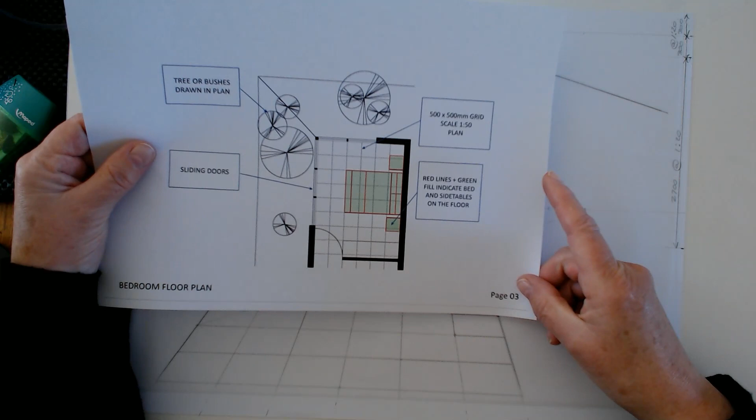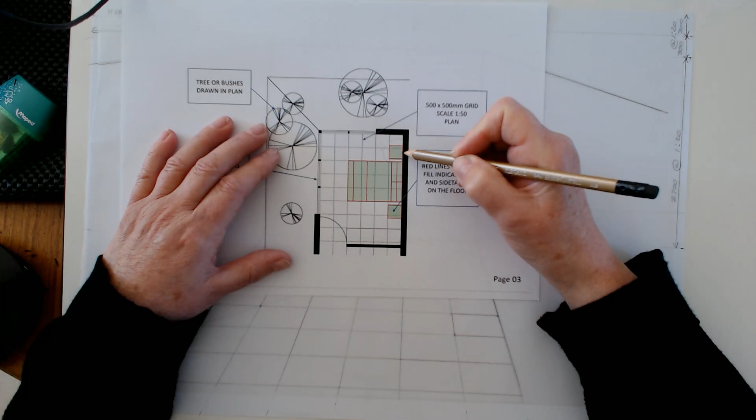Yeah. Okay, so I could just use this piece of paper now so that you guys can see what I'm talking about rather than having to go off screen all the time. Okay, and then I can draw all over the top of it, which is always good. Okay, so we're going to draw this one first. Yeah. Okay, so as you can see, it starts just before this first grid here. All right. So if I look at that, I also can see that it's only 500 wide as well. So let's draw this one first and see how we go.

So I'll put that up there so I can see it. And so this is my first grid on the floor. And as it was saying, it's going to start a little bit before. So I draw a line a little bit before the end of this first one. I'll draw it so it comes out and it hits the 500 mark there. That's a 500, that line there. And then it stops again a little bit before the second one. So I'll draw that. And so then I will have something that looks like those two lines. And then I'll go from the front line here, follow it back to the vanishing point. And then I should have, sorry, Pussycat's coming over to help again.

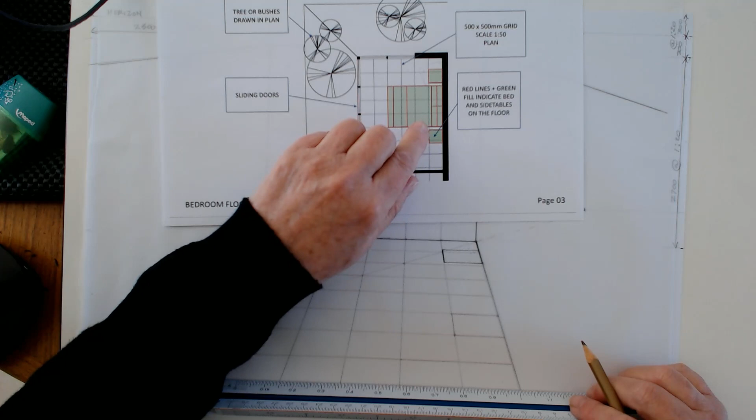I should have something that's like that. So it starts just before the first grid and then it finishes just before the second grid. So if you look at this one here again, just before the first grid and just before the second one, because the bed actually starts 2 boxes from the wall, and it comes out 4 boxes or 4 grid lines.

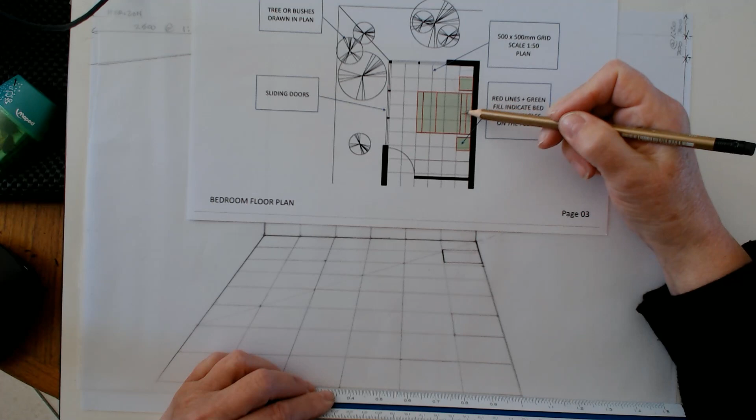So I can count that. I can go 1, 2, and it starts here, right on that line, and it comes out 1, 2, 3, 4. So it finishes out here. And then it's 3 of these grids wide. So I go 1, 2, 3. So that's where the bed finishes on the ground. And then it comes out 1, 2, 3, 4 to here.

What are you doing? Stop doing that.

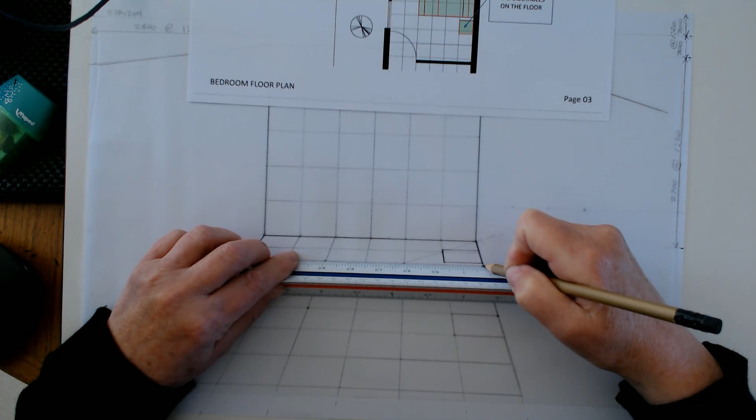And then I'll end up. So the grid on the actual plan will help you place the grid in perspective. And again, I can go from here, from the front part. It'll follow the grid anyway. Draw a line so it does that. I'm just going to get rid of that thing underneath here, so it's not as dark, so you don't get confused by that. That's just me bringing that back a bit so it's not as dark as it was.

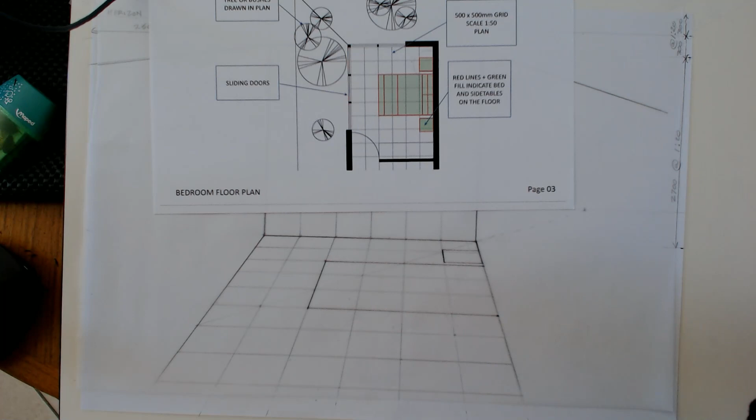There we go. Okay, so far we've drawn the first side table here, and then the bed, and then you guys work out where the second side table is, and I'll draw it. So the second side table starts a little bit away from the bed. So if I go, okay, a little bit away from the bed, so I'm looking at about this much, and then it finishes 500 again, so I go to the next square and do that.

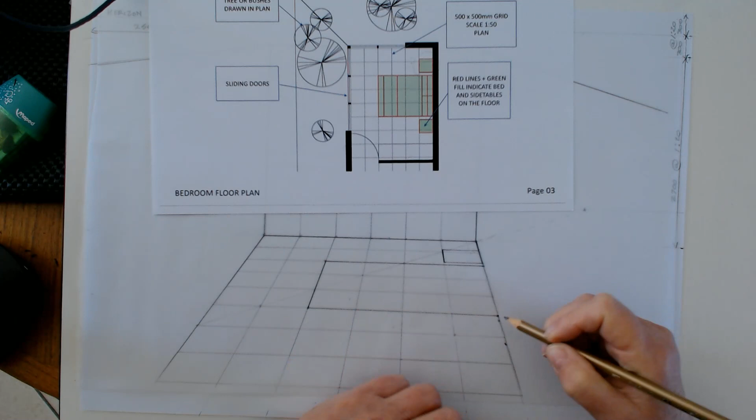Now here you can see that the space between here and here is different from the space here and here, and that's because it's getting bigger as it comes towards you. So I'm sort of navigating and just making it start where I need it and finish where I need it to finish. And again, then you can draw the lines going across out to the 500, because that's how deep this is. And we follow that one out. Use your T-square, or make sure your ruler is parallel with the grid.

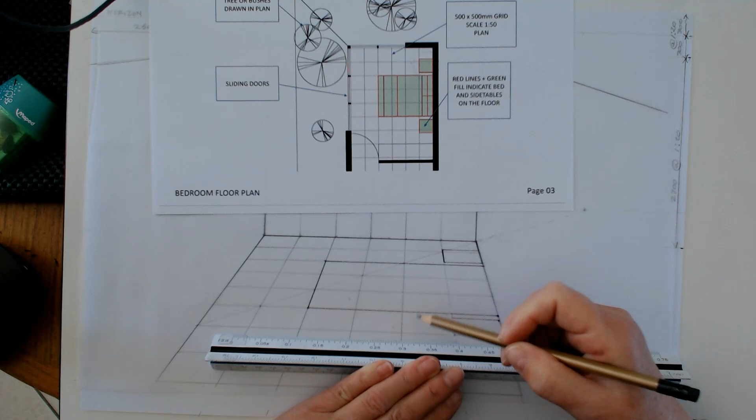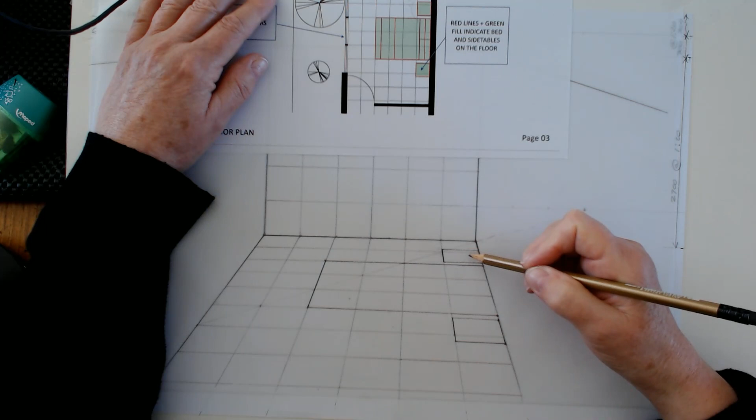And then if I follow this front part back to my vanishing point, it should intersect those lines. So there is the plan drawn on the grid. So this plan now has been drawn on the grid in here, as you can see. And if I put a piece of paper underneath it, probably better for you guys to see. You should have something that looks like that. Yeah? Okay, good. Let's draw the windows in, which are here.

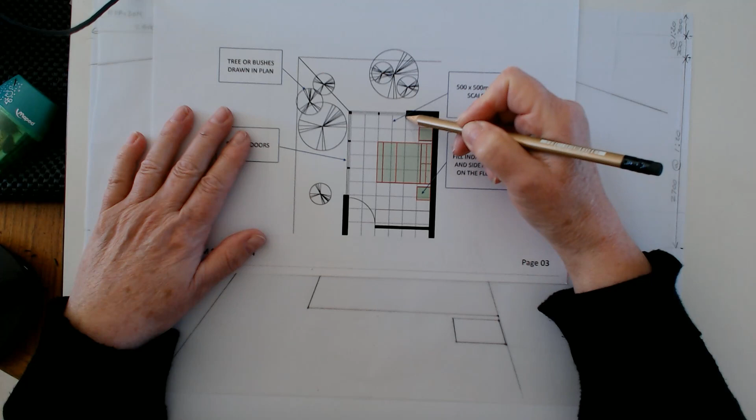So the wall stops a meter from this wall here, and then each one of these is a meter away, because each one of those squares is 500 by 500. So if I go back to my grid and mark on, it starts 1 meter in. And that's where the first door is going to be. The corner of the room is going to have a door, and then I'm going to count 1, 2 boxes in perspective on the ground, and that's 1 door, another 2 after that. That's my second door, and that's my third door. So I've just marked those using the grid.

The height of the doors I changed from what he's done. He made his 2100. For the purpose of what we're doing, make the doors go up to 25. So if we count up, 1, 2, 3, 4, 5, it just means that you don't have to measure something again. So you can either have them at 2000, which will be roughly 2100, or you can have them at 25.

All right. So if I follow that up to the 25, I can draw a line going up like this. I can draw a line going across until it hits the corner of the room. And then I can draw this one going up because this is the second one. I'll draw that one in. So that's my 2 sliding doors there.

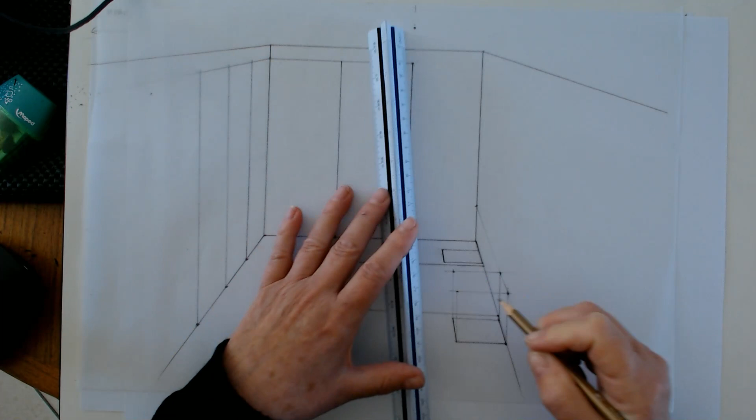So this one will come up until it intersects with that line that came out, and this one will do the same. Make sure it's as straight as possible, and then I need to draw a line going from here to here, and I can do that by putting my pencil on that point and going back to my vanishing point. And if I'm good, then that line will go through that dot that I just had here. So that's how you get the height on any of your objects.

Okay. Yeah, but I think I have to. No, I think I'll do it now. Because my stuff. No, all good. Yeah, I've done it. Okay. So there's the first one. You all right, kitten?

Oh. Sorry, that's exactly where I have issues. So mine, this side, I don't know if I can show you this. How can I show you? Can you see that? Yes, I can. It looks big, like bigger than yours, and it passes the line of the bed. Yeah, no, it looks fine to me. Looks fine? Yeah, I think it's going. So the top, okay, I should do this, so it looks, maybe it's correct. It's probably correct, it's just that mine looks smaller on screen maybe. But as long as you've done... This is the bed, like one side.

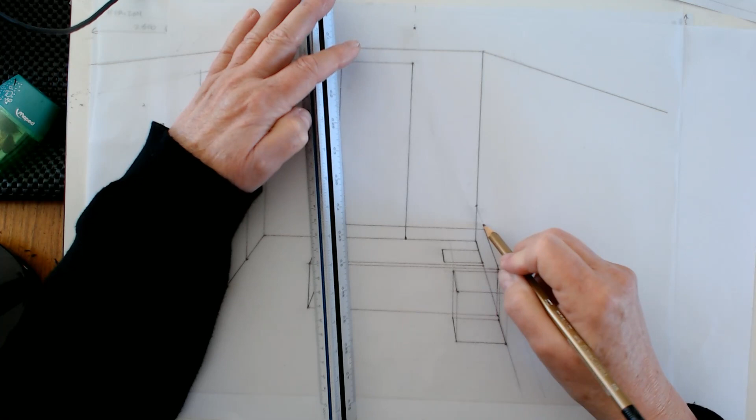I've used my ruler to find the point and then I've marked it. But don't draw the line because then you end up with too many lines. All right? And you can do the same with this one as well. You can put your ruler at the bottom of that one and then again, if I could get this straight, I'll come up and mark it on that 500.

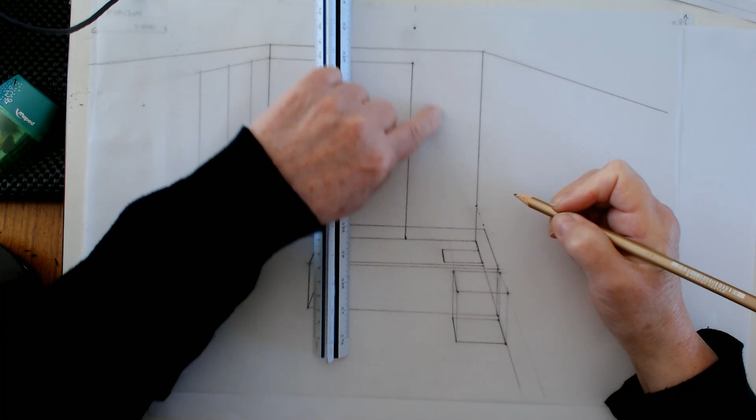Right? And then again, I will draw from there straight out into the perspective, keeping my lines straight. On this side, I don't know if you can see that, I'm using these lines here to keep my ruler parallel. And I'll draw that coming out. Not very far because it's only the table.

And once I've done that, and once I do the other one on the other side, drawing a small line out, I can actually come back to this one at the front here, put my ruler between that point and the vanishing point, and draw a line going between these two lines I just drew out that way. So we've just drawn the top of the other side table.

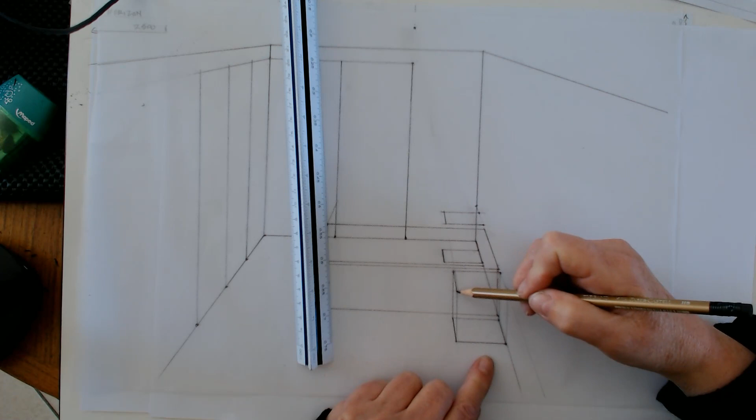All right. Okay, sorry. Why do you use the other table? Because it's still the corner, and it makes it easier for me. Rather than bringing it up this way, I'm actually using this so they both look like they sit properly together. All right, so the same line. Yeah, and they will be the same line. That means I don't have to draw another line going up here and another line going up there. Again, it's cutting down on the amount of line work. So I can use another object of exactly the same shape and size to help me draw this one.

And then all I have to do is some very, very simple lines that go straight down. So they will be vertical at 90 degrees, and then I can see the top of my table. Can you see that? Yeah. Okay. Then get rid of all the stuff that you don't want to see. So I'm going to get rid of that on the bottom. I'm going to get rid of the line inside the bed there as well, because that's annoying that I drew on the ground. So I get rid of it. And I'm going to get rid of that line too because I won't really see it.

And I'll just clean up these lines as well. I won't see the bed inside there, and I won't see that line or that line, and then I won't see that or any of that because the bed's there. So I'll get rid of that. And I end up with that. And then I'm going to, this is really weird, use that, and that one. So I end up with something that looks like that.

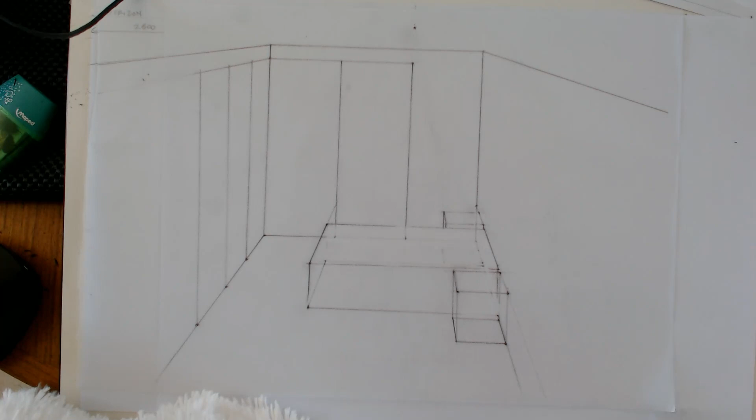All right, so put another piece of trace paper on the top like this, and then I'm going to stick it down. Sticking down is always a good one.

Yeah, I don't think this is the right black rubber. You know how I've been going on about black erasers and how wonderful they are? Well, I don't think this is the right brand. It's awful. I thought it was better than that. I was really excited for a minute there.

I'm not excited anymore. All right, so this is making it look a little bit better, and we can see it. Now we can start to get a little bit creative. So what you can do is very lightly go over what you've already done, but leave out any lines that you don't want. So I'm going to leave that line out and that line out so I don't see it all the way through. So I'll just very lightly go over it.

So the final version is very neat? Absolutely. On another trace paper? Yeah, where we don't need all of these dots. No. The dots and things will disappear. It's just so that you can see. But you redo it on the second trace paper? Yeah. It's just so that you can end up with something neat. But you do the dots for us? Yeah, so that you can see where things are intersecting.

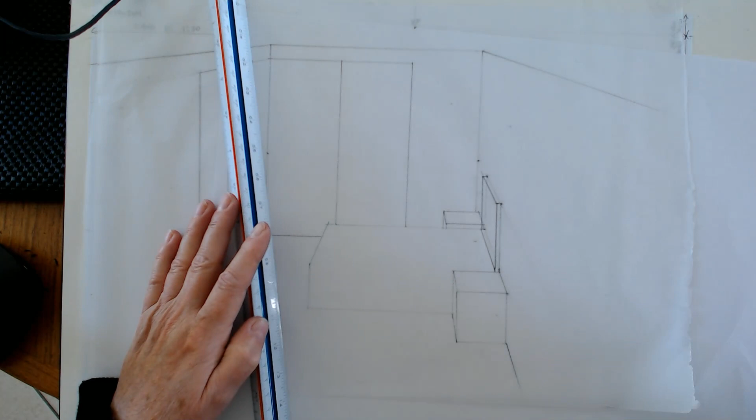So anything that remains vertical and horizontal will remain vertical, and lines that go that way will be horizontal. But the sides of the objects, see how the side of that object and the side of this object have angles on them? All have angles. Okay. Yeah, that's right. And then I'm just going to follow that line down so it looks like the bed head goes behind the bed. And then I'm just going to draw a line from there to there, and then get rid of that. So I'll miss part of my other side, and then that's my bed head. Just very simple. Just make it square.

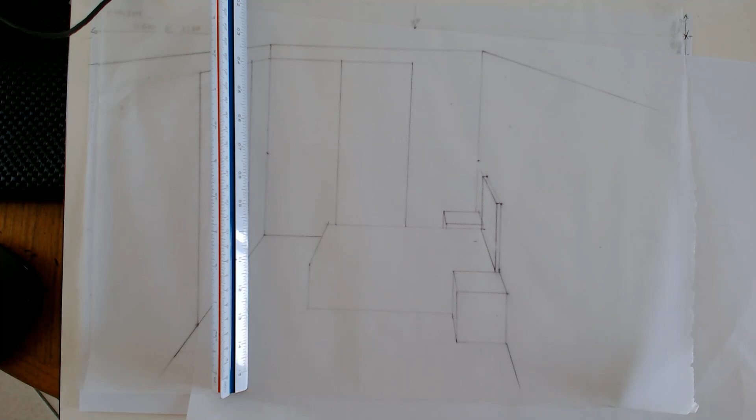So all of these, when you look at them, they've got a face and two sides, and they've got a top. Now the face of everything will remain vertical and horizontal. Okay? See how that's vertical and that's horizontal? But the sides of everything are at an angle that goes back to the vanishing point. Okay, correct. Now let's put a picture above that.

And I'm just going to draw my picture so it ends up being the same width as my bed head. So I'm just going to draw a couple of light lines from the back of my bed head all the way up. I don't know if you can see those. You can't see them, can you? Let me do that again with a little bit more oomph. That one. And then there. I'm just going to make it sit exactly in line. It's going to be a long picture.

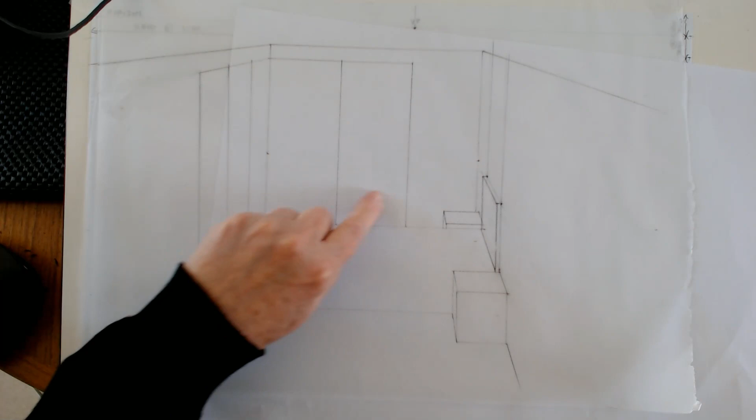Like that. And then I can work out, if I want to have the picture start 300 above my bed head, then I've still got this mark on the back wall. I can measure up on this line because this is the only thing that's in scale. I'll do it this way because otherwise I'll confuse you. Can you see that 300 on that side? I'm going to measure up from that point 300, and then from the top here I'm going to measure 300 as well.

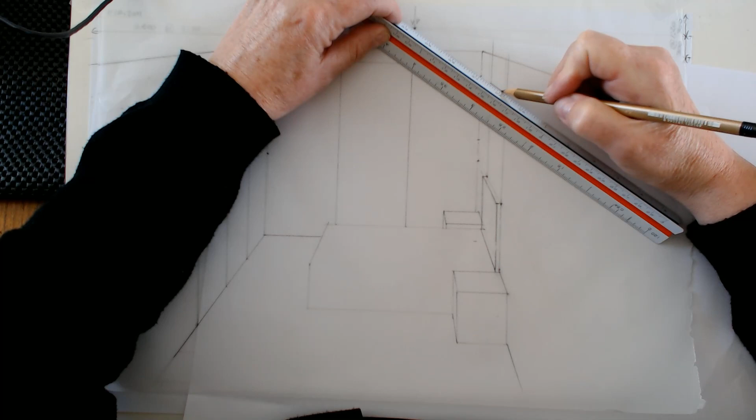So from the top of the room and from where we had the height line point on this wall. Mm-hmm. So up 300 and then down 300, and whatever is left in between. Once I've done that, I can then bring those two heights out along this wall so it forms my picture. So from my vanishing point, between those two vertical lines there, I can just darken in where my picture is going to be, and you can put any sort of design or picture in there like that. So there's my picture. Can you see it? Yeah. Okay, above there.

Okay. Now we're just going to draw the outside where the veranda or whatever it is going to be, and all I'm going to do is go back and use my grid to help me draw it, but I'm not going to use the lines on the grid. So I'm going to pretend somewhere about here that I'm going to draw a line going horizontal all the way across until it gets almost halfway through

that second door. And then from that point, I will draw a line coming down from the vanishing point, and I'll make it stop where the door is. Because I'm actually drawing backwards into the vanishing point, what that's going to do... Sorry, the height of this line doesn't matter? It doesn't matter. Okay? You could make it start from there. You don't have to measure it, just sort of guess it.

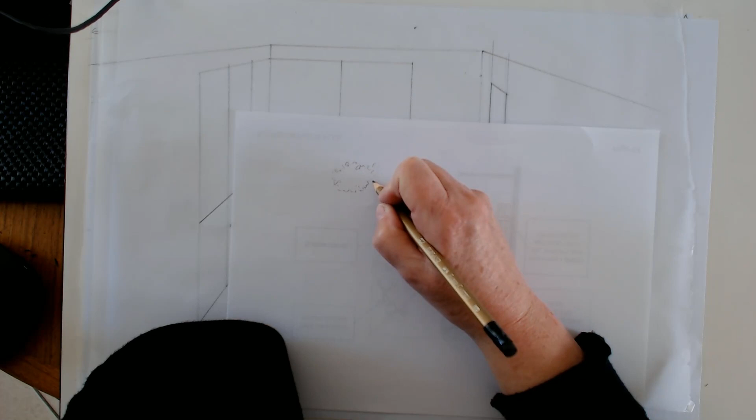So to draw bushes, which sounds really weird to say, it's just a squiggly line. And you don't do all of it. You just do some of it, like this. Can you see what I did there? Yeah. And then occasionally you can put a leaf here and there, like that. And that makes it look like a lovely thing. See it? I think so. My daughter draws pretty much the same. Yeah. Okay, so that's just a bush, all right?

So that's what I'm going to do at the bottom here. I'm just going to very lightly do this, so I know where I'm going to put everything. And I'll do it over here so it sits over the bottom of the tree. Nice little bushy type of thing. Like that. And then these two things on the ground, I'm just going to bring them up and draw.

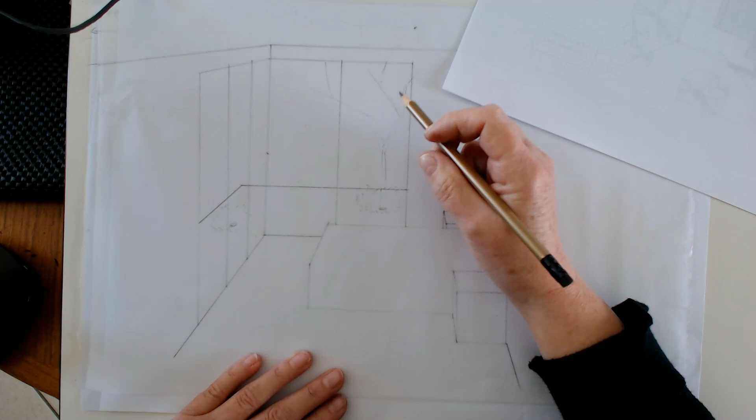My daughter will love this. Bush and the trees and flowers, and floors and things like that. Yeah, can we have a cat there too? Yes, where would you like the cat, on the edge of the bed? Yeah, very nice. That would be really good. Okay, well, we'll see what happens there.

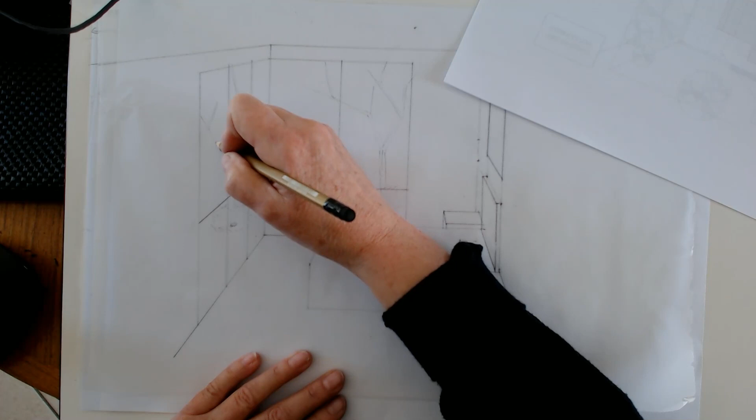We'll see what happens. So I'm just drawing a very basic tree, and I'll do the same here as well. I don't know what sort of tree it is. Don't ask me the plant name of the tree. It should be some sort of gum tree. Yeah, or maybe the jacaranda. A jacaranda, different kind of tree. I'm pretending that it's a paper bark tree, small paper bark trees. That's what I'm thinking, and I'm going to stick to that. So just very simple, because we can come in and put detail later. And then with the same squiggly thing, you can do here as well, around where the branches are. Okay.

I love the details of the bed. Yesterday you put the pillows and I really like that. Okay, we're going to do that. We are going to do that. Yeah, this looks nice also outside. Yep, and we're not going to do a lot of detail on the outside. We're just going to put in a little tiny bit, and we'll come back and do some more.

I'm just going to get rid of that. This is the last trace paper that we're using at the moment. If you need to do another one, by all means, do that, because it's up to you what you can see. So I've got a bush, a tree, and a tree outside. That's lovely. Thank you so much. Now, we are going to draw some pillows on the bed, some lights, and a throw as well. It's not easy to draw those trees. Sorry? The tree is not easy to draw.

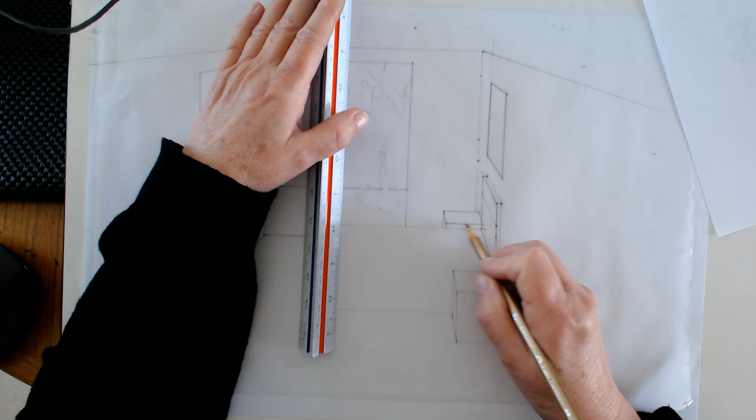And then I'm going to come in here probably to, I don't know, around about, let's say halfway through where the side table is, so somewhere about there. And then from that point, I'm going to draw a line diagonally like that. Do you see that? Yeah. And then I will bring this line back down here very gently, like so, until it gets to where the bed is. So that's where the line on the bed originally was.

And then from that point, I will draw another line from there going up so that you've got something that's leaning back like that. And I can just get rid of what's in there and what's in there. And then I'm just gently going to take a little bit of that off. Now that's just setting you up so that you can draw your pillows. And my pillow is going to now become puffy. This is where you do a bit of freehand drawing on this side, and it will be not as puffy on this side.

Okay. So that it ends up doing something like that, and then I'll find the center of this and do that a little bit and do that a little bit, and then that one comes down and just a pointy thing, and just soften all of those. So I end up, and I'm going to curve that slightly and curve that slightly and make that come down and around like that.

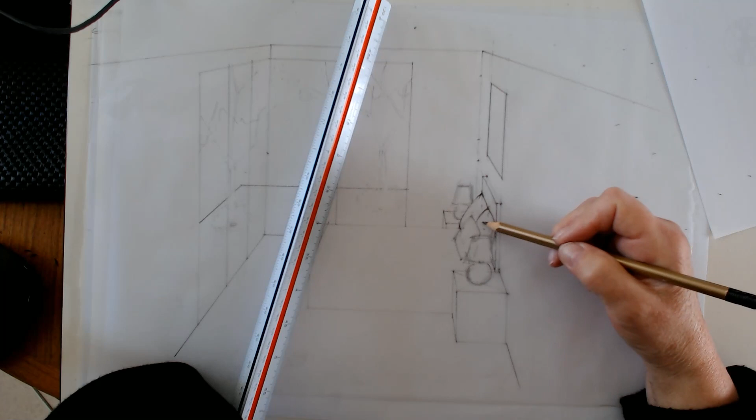All right, so we've got lights, we've got pillows, we've got a picture. Now we want to make the bed look nice and soft. At the moment it's still a bit too square. So I'm going to leave that line as a straight line, but then I'm going to very gently curve that corner there, and then come down and very gently curve that corner there. So see how now that looks smoother? Yeah. Okay. That's it. Don't draw that line there.

Then he does this thing which is really quite cool. Not where that line is, he sort of starts a little bit further down, and he does this kind of thing, all right? Just at different and odd angles. Mm-hmm. And this is where you go, okay, so the first two here, I'm going to do that. And the second, leave a space, do that, do that. Very, very slight curve between the two of those lines, like that.

And then on the inside, I'll very slightly curve every second one, like that. So you get something that's going to look like that. That's good. Yeah. Okay. So it just looks like it's a throw. Like it's one of those, just a thing like that. So that then looks like it's sort of nice and soft.